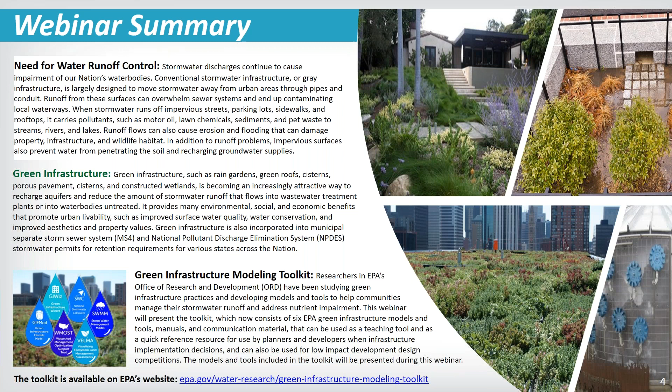And before we get started, I'm just going to give a really quick background for people on the line who aren't as familiar with stormwater management and issues. There are several issues with stormwater management across the country. We have cities with combined sewer systems, which is stormwater and sewer waste combined in one pipe. And when we have storms, this can cause wastewater facilities to get overwhelmed.

So a lot of times the stormwater, which is polluted with different things that are picked up as it's running down the streets and roads, is discharged raw into receiving water. So sometimes we have untreated water being put into our water bodies. And also, as we've been seeing lately around the country, the past few days especially, it can result in a lot of flooding as well when we're talking about traditional infrastructure, pipes.

And as you can see here, there's some pictures of what traditional infrastructure looks like for stormwater management. There was an EPA needs survey in 2012, and you can see here there's billions of dollars in need for stormwater management control.

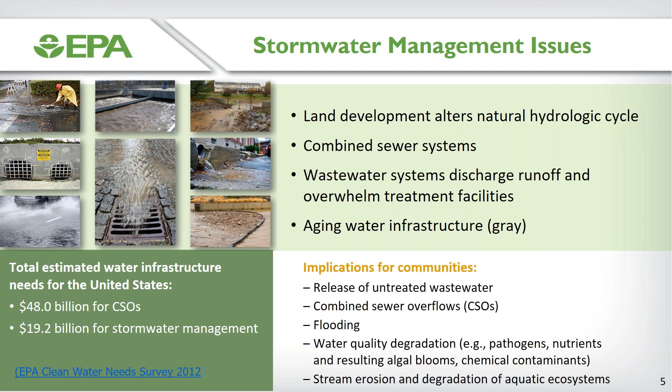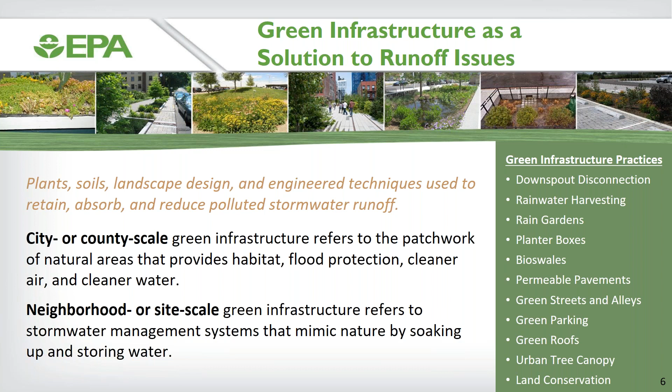And so we consider green infrastructure one solution to stormwater runoff issues. Green infrastructure is really a natural way of allowing water to reabsorb back into the environment as it would naturally. And you can see here the different practices that we consider green infrastructure. And benefits, of course, there's water quality benefits, but there are also cost savings, community aesthetics, and air quality as well.

So at EPA, we're working with states and communities. We're identifying implementation opportunities to provide either green infrastructure implementation or even a combination of green and gray, because we know everything can't be replaced with green infrastructure. So we've been working on developing models and tools to integrate green infrastructure or a combination into different communities for managing their stormwater.

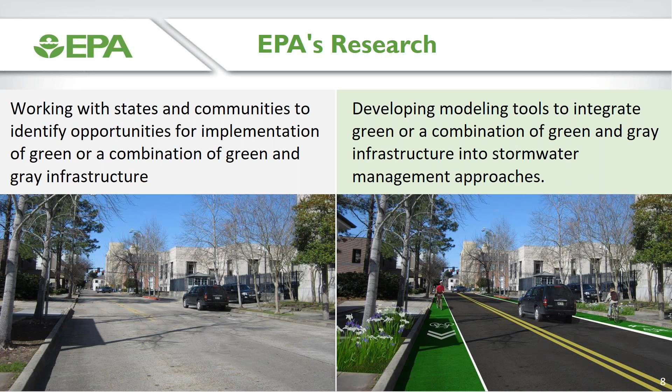So over the years, we have been working to develop numerous models, and what we've done is pulled them together in a toolkit. This toolkit originally had 5 models when we started. We now have an addition, which you'll hear about today, our 6th model. And so the toolkit has the models, the manuals, fact sheets, and also a summary video. It's a really good training video that you can use in academia, or in your communities to show decision makers what these tools do, who can use them, and it'll help you make good choices as far as what model might work for you.

So with that, I'm going to introduce our first speaker for Green Infrastructure Wizard, Dr. Marilyn Tenbrink, who is a special assistant to the director of our Atlantic Ecology Division in our Narragansett lab. So with that, Marilyn, I'm going to turn it over to you.

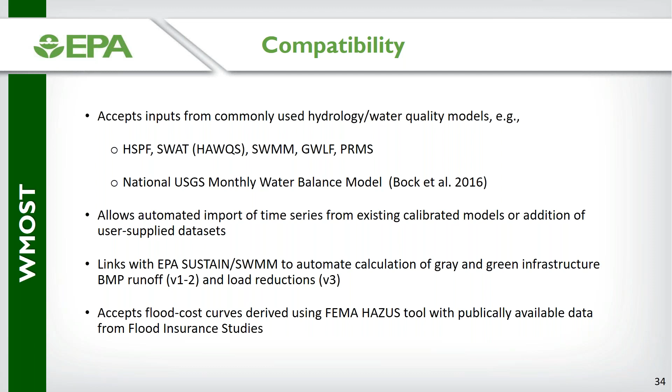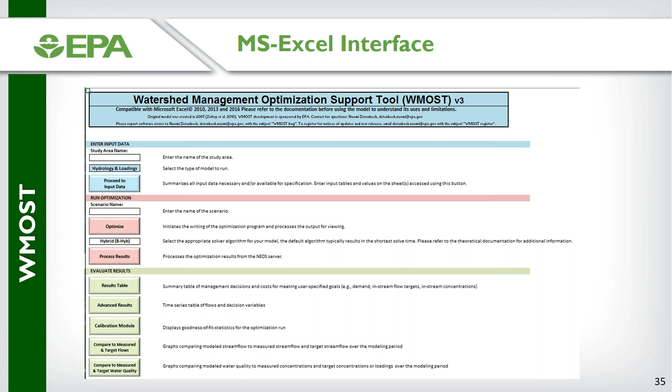We have a wide range of management options that you can explore in WMOST, including land conservation, water conservation, demand management or incentives, changes in infrastructure for both drinking water and wastewater. This can include fixing leaks, increasing capacity, changing sources, or upgrading these systems to improve water quality. We also allow users to evaluate water reuse facilities and aquifer storage and recharge, interbasin transfers, and a wide range of best management practices, including green infrastructure.

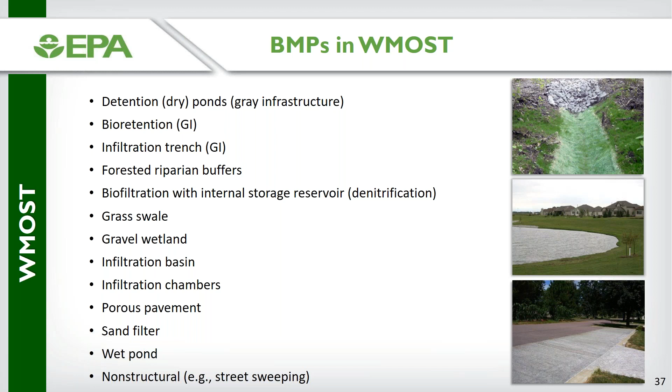We're continuing to add functionality to WMOST. These are some of the things we're working on currently. We're adding to the data library of pre-processed models. I've shown a list here of some of those that we'll be adding. We are working on robust decision-making modules, which take advantage of WMOST and help the user to find robust solutions in the face of uncertainty in future climate scenarios.

We are working on a co-benefits module, which will allow the user to examine ancillary benefits of the management practices, including GI, such as ecosystem benefits, human health, energy savings, improvements in real estate values, reductions in drinking water treatment costs, etc. We have a number of training and tech transfer activities going on.

In addition to this webinar, yesterday we had a webinar just focusing on WMOST. That will be available on the EPA Tools and Resources website. We have another upcoming webinar that will go into more detail on March 8th as part of the EPA's water quality modeling webinar series. We also have training materials posted online on the website, so you can refer to that for more information.

We are also creating a parallel version of WMOST. WMOST optimizes only for cost, but allows people to address multiple goals as constraints. The multiple objective version of WMOST will allow people to look at different objectives simultaneously and to generate trade-off curves. And finally, we're starting to look at scaling up and linking watersheds. WMOST is currently designed to deal with the small watershed scale, say HUC 12 to HUC 10, to about 10,000 to 40,000 hectares.

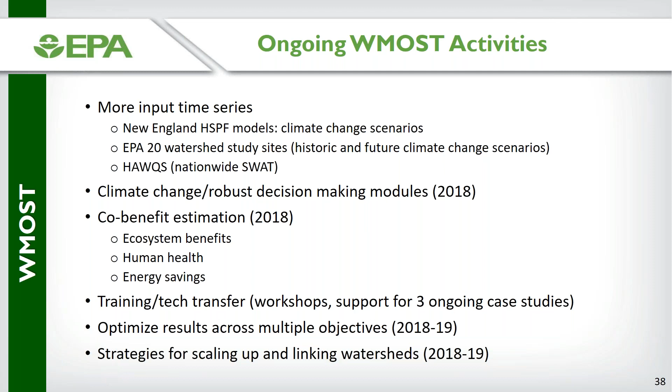So with that, I will turn it over to Dr. Bob McKane to talk about the VELMA model, Visualizing Ecosystems for Land Management Assessment.

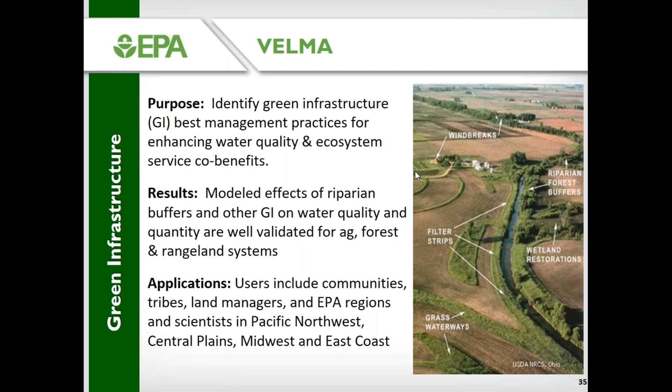Okay, so VELMA is a watershed model. It provides a look at fate and transport of water and nutrients, and it scales from small plots up to watersheds, including regional watersheds such as the Puget Sound ecosystem. And we've simulated a 10,000 square mile area in eastern Kansas, and I'll mention that briefly too. But the idea behind VELMA is that it's a very fine scale look at green infrastructure. The watersheds are divided up into a grid. The user can specify the grid size. We go as low as 2-meter size grids for various purposes such as urban applications. And this allows us to look at how riparian buffers function.

VELMA is an eco-hydrological model, meaning that it's a hydrological model linked very tightly to a biogeochemical model, in other words, a nutrient cycling model. And we're also entering contaminant cycling into this as well. It simulates the effects of climate and land use on stream flow and transfers within soil columns. It represents vegetation and soil interactions, and so it simulates the uptake, transformation, and transport of carbon, nutrients, and toxics from terrestrial to aquatic systems. And it does a very good job of that. We've done a lot of validation.

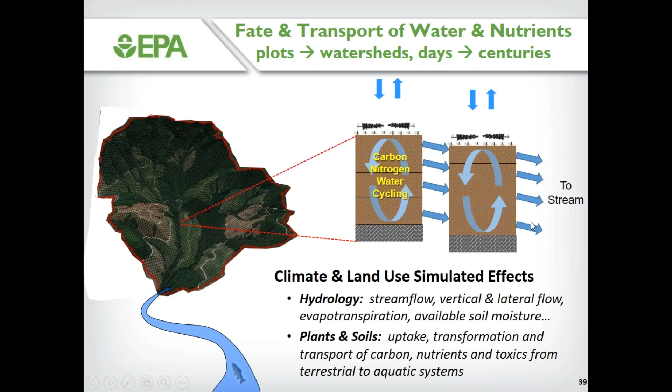And buffers provide very good protection, as we all know, for stream water quality. And it simulates that. If these near stream areas are cut, then you get an increase in the flow of water and nutrients to the stream. And that impacts fish habitats. And we're linking to various wildlife and fish habitat models to look at consequences downstream.

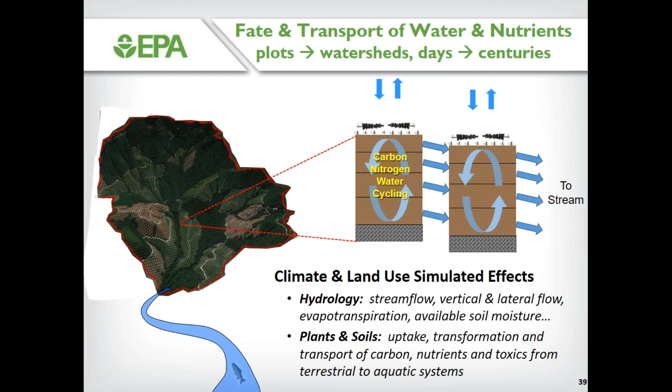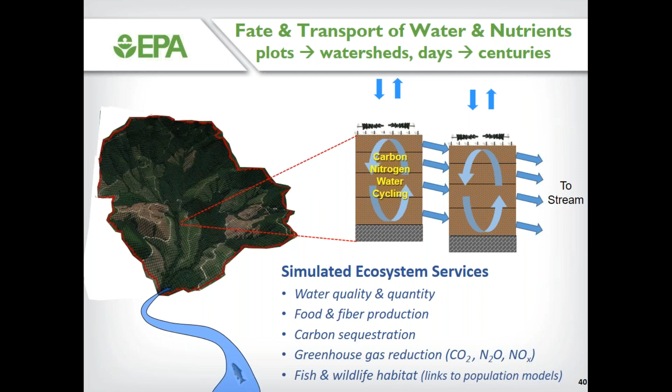Simulated ecosystem services include effects of climate and management on water quality, drinking water, recreational opportunities, and also flood protection. Food and fiber production is included. This is all dynamic. Simulations run from days to centuries if you need to do that. It also simulates carbon sequestration and opportunities for carbon trading. I'll talk about that briefly. Also, climate regulation through greenhouse gas reduction. And that's all in the biogeochemistry of the model. And as I said, we're linking to fish habitat models especially, and ultimately also terrestrial wildlife. So VELMA's been applied in many places across the country.

Starting down here, we began with the Chesapeake Bay Agricultural Forest Buffer Effectiveness Study, and I'll talk about that. And I'll also focus on salmon recovery planning in Puget Sound and how that's going. And we're working at the scale of national estuary programs out west here, Tillamook Bay and also Puget Sound.

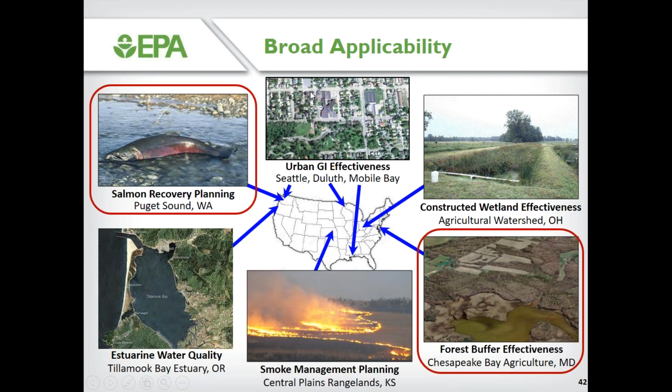We are nearing completion on a smoke management planning effort with Region 7 in eastern Kansas, and just moving into urban green infrastructure effectiveness. So let me begin with an example, the Chesapeake Agricultural Water Quality project that we began a few years ago now, working with the Smithsonian Environmental Research Center, and we've validated VELMA for an example study that was intensively studied.

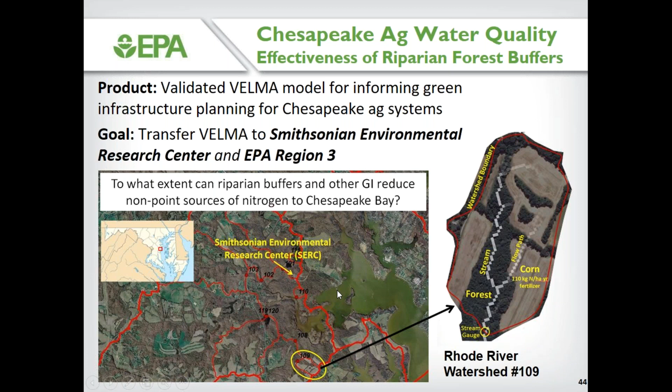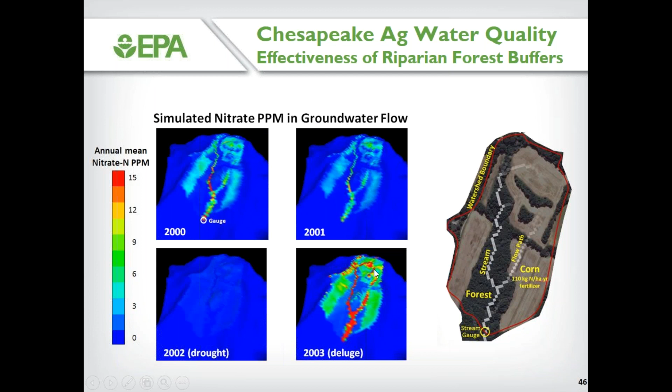But it's leaky. During this deluge of 2003, the riparian buffers were actually overwhelmed and couldn't perform as well as you would like to see. So that's shown here. This is simulated nitrate in groundwater flow, and you can see how much breakthrough there is during this deluge. Very interesting results. And we did sensitivity analyses that showed that present-day buffers were working quite well in most years until that deluge, and that they can reduce ag nitrate sources by about 90%, keeping that much out of the stream.

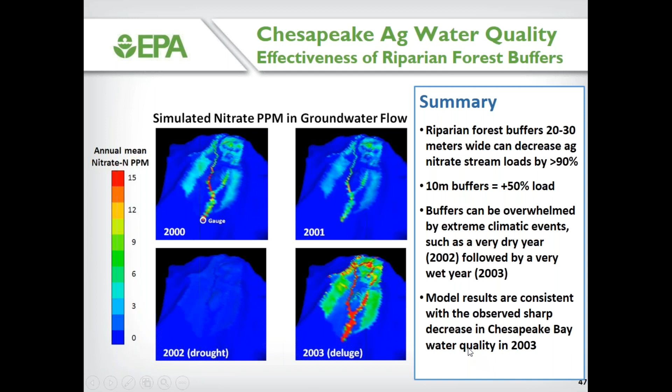If you were to cut the existing buffers back, that would increase the nitrate load by about 50%. So the message here is that buffers work really well, but they can be overwhelmed by extreme climatic events. And so perhaps one option would be to think about cutting back on fertilizers. And VELMA does trade-offs between ag production and water quality protection. I'm not going to show that here. There just isn't enough time. But the model results are consistent with the observed sharp decrease in Chesapeake water quality in 2003.

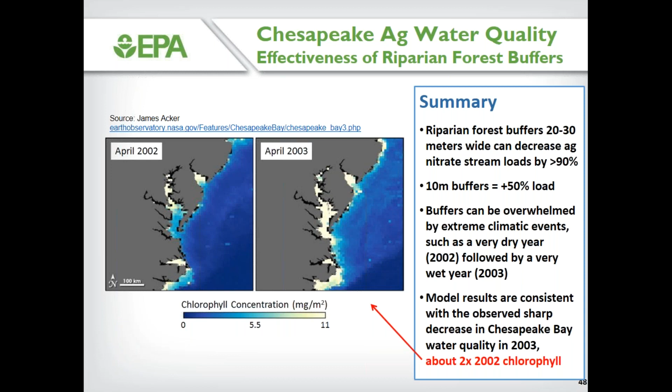In 2002, which was the drought year, this is a satellite translation of chlorophyll concentration, in other words, algal blooms within the bay. And you can see it's not great, but it's not doing too bad. 2003, when all the fertilizers had built up during the drought year, and then more fertilizer added in 2003, you can see that there was a major algal bloom all across Chesapeake Bay. So VELMA is really indicating why that bloom happened, that there was breakthrough through the existing buffers. And so as I say, one consideration for decision makers is what should be the cap, if there should be one, on ag fertilization to avoid this sort of thing.

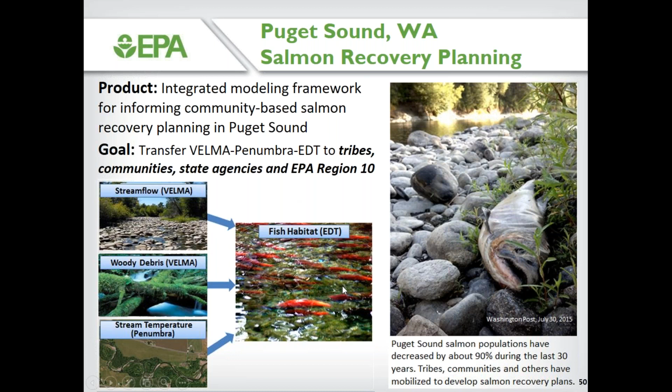Moving to Puget Sound, we're working with tribes and communities in Puget Sound to assist them with salmon recovery planning. Salmon populations in Puget Sound have decreased by about 90% during the last 30 years. And tribes and communities and others have mobilized to develop recovery plans. They are currently using VELMA to look at effects of land management on stream flow and woody debris, and we've also built a stream temperature model into VELMA so that we can pass all this information to a fish habitat model and parse out how different species of salmon are affected. And a key result of that is that for the system we're studying, Puget Sound is up over here in the upper left.

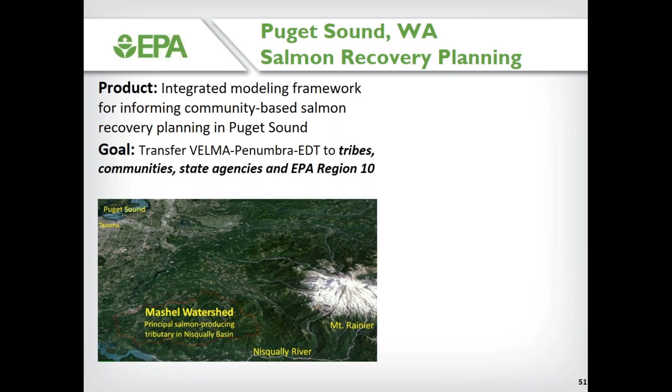The river that we're studying flows off Mount Rainier, flows 80 miles to Puget Sound. And this is the primary salmon producing tributary to the Nisqually River. And heavily harvested, as you can see, these lighter areas in this satellite photo are clear cuts. And so what we found is that by going to longer rotations, summer stream flow could be doubled.

Not enough time to get into that story, but it's basically an age effect on transpiration that causes this stream flow increase. And so we are able to inform policies that are being considered to try to increase summer stream flows for salmon when they try to swim upstream in the late summer and spawn.

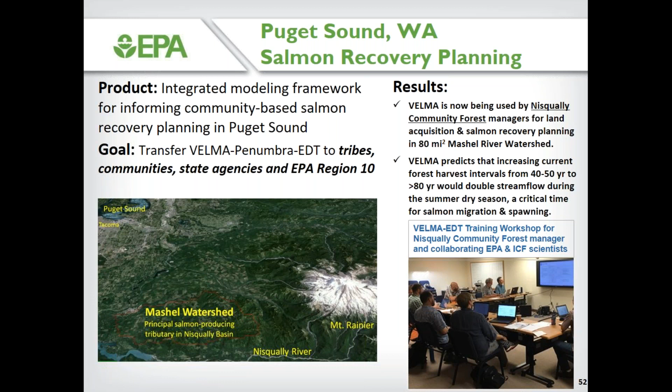Right now in this watershed, which used to have 10,000 steelhead come up in the fall, they're down to about a couple hundred steelhead. And so right on the brink of extinction. Chinook salmon have already gone extinct there.

So a key thing is trade-offs, as our other presenters have talked about. We're currently working through final simulations for the study watersheds and comparing industrial forest practices, which seek to basically increase timber yield and profit for shareholders. Very few local dollars result from that to local communities because the timber gets sent out overseas.

And the community forest approach, we're working with various community forests in the region, and we're trying to balance ecological, economic, and cultural benefits for tribes and communities, and coming up with solutions that end up with a better balance of efforts, and including ecosystem carbon stocks.

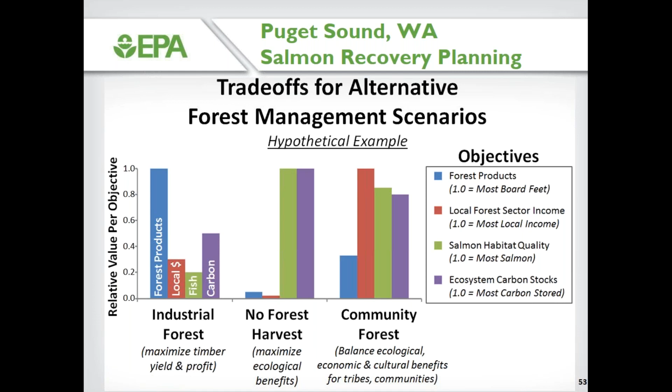The community forest owners that we work with have just made the first deal in Washington State to sell carbon credits to Microsoft, who wants to balance their carbon budget. So that's it, and thank you.

I would like to introduce Michael Tribby, and he's going to talk about SWIM.

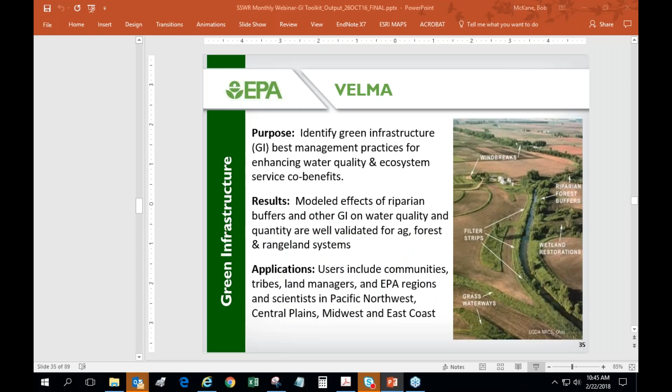Great presentation, Bob. Thanks. Can everybody hear me? I will take that as a yes. You're good, Michael. We can hear you. Okay, and I trust that you can see my presentation. It's getting there. Okay. How about okay, you're good. Thanks. Yep. Fantastic. Thank you.

So I'm going to switch gears a little bit here. Bob talked about VELMA, which is a great model for dealing with natural watersheds and rivers. And I'm going to talk about SWMM, which is applied in urban watersheds.

So the major difference is that an urban watershed is dominated by man-made drainage structures like curbs and streets and hard surfaces and stormwater catch boxes, and a network of sewer pipes that conveys stormwater and sanitary wastewater to treatment plants.

Okay, and SWMM is a model for simulating these types of environments and the drainage structures found in these types of environments. So we call that urban hydrology and hydraulics modeling. A key feature of SWMM is that it's a dynamic model. So it allows the user to predict the transient response of the drainage system to a storm event. And this is important so that we can determine if the drainage network is sized properly and is going to perform the way that it is intended to perform.

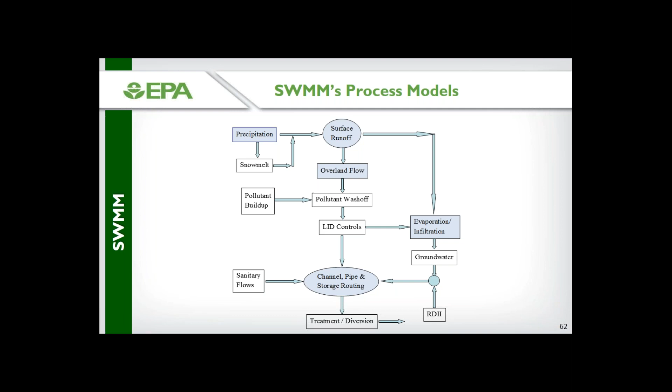And SWMM has been around for a really long time. It's nearly as old as I am. It's going to be 50 years old in 2021. In its early history, it was written in Fortran. And in the early 2000s, it was redeveloped and rewritten entirely in the C programming language. And it has been under active development by the EPA since the early 2000s.

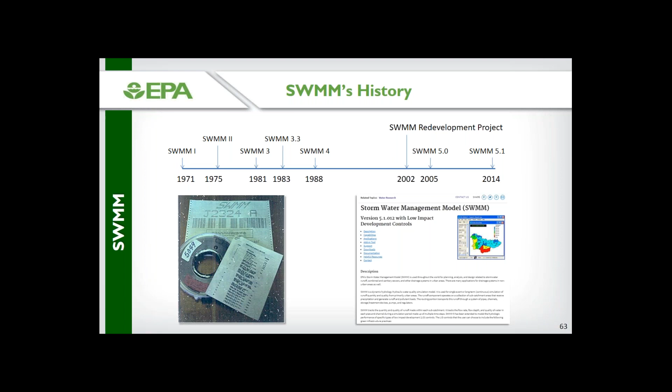So who uses SWMM? Well, SWMM is a professional tool that's used by licensed civil, environmental, and stormwater engineers. It is used by municipalities that design, maintain, and manage stormwater infrastructure and sanitary sewer infrastructure. And we're proud that SWMM is used across the United States and around the world.

We routinely take support requests from consultants who serve municipalities in the United States, and we take questions from all over the world: South America, China, other parts of Asia, Africa, Europe.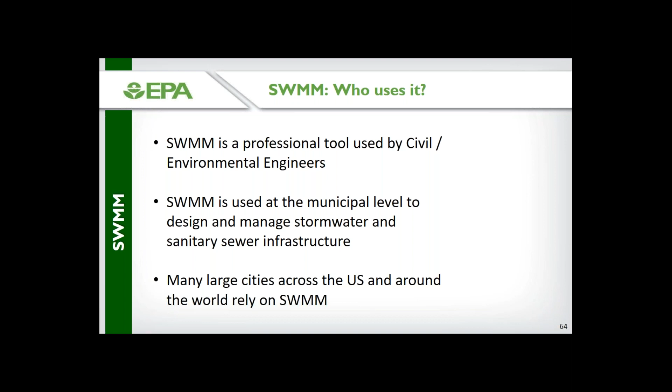And what do these people use SWMM for? Well, specifically, they use SWMM to design and size their man-made drainage system components. They use it to develop control strategies for combined sewer overflows, like Michelle described at the beginning of the presentation. They model groundwater inflow and infiltration into sanitary sewer systems.

They can use SWMM to better understand non-point source pollution in urban watersheds. And they can use it to evaluate green infrastructure stormwater control alternatives. And it's used for floodplain mapping of natural channels.

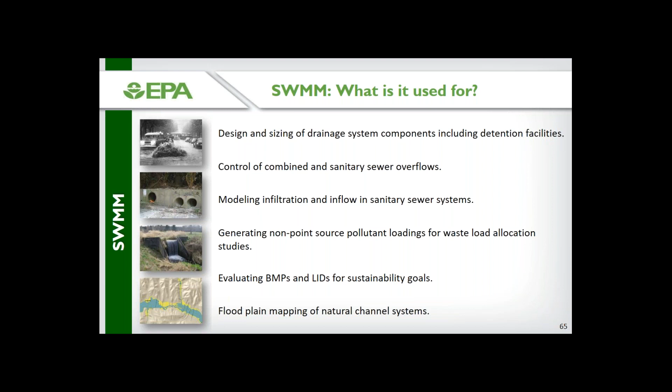One of the most recent additions to SWMM is the capability to model structural green infrastructure BMPs. So SWMM includes process models for a wide complement of green infrastructure controls. And there's many different types to choose from that can be flexibly used in many different drainage control applications.

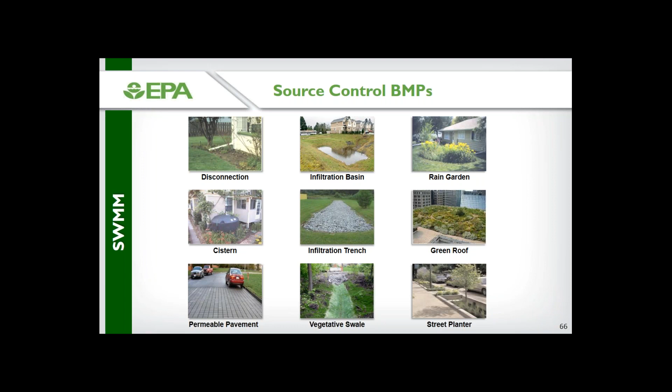So now I'm gonna switch gears and do a little example for you to show you what the SWMM model can do. And because SWMM is widely used and it combines the ability to model both green and your typical gray infrastructure stormwater control strategies, it's an ideal platform for developing and evaluating hybrid control, which is stormwater runoff control strategies combining both green and gray infrastructure. So this example is designed to illustrate that.

So this is a typical SWMM application. It's an urbanized catchment of 500 acres, and it produces an average daily flow of 1 million gallons of wastewater per day. And when it rains, this combined sewer overflow gets activated about 64 times annually. And so that would result in a direct discharge of stormwater and combined stormwater and wastewater into the river, which is something that we don't want.

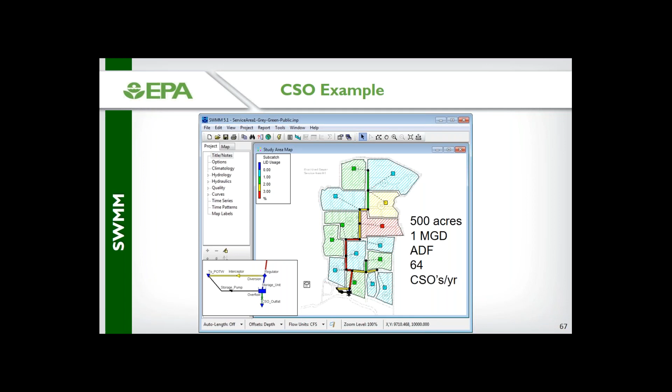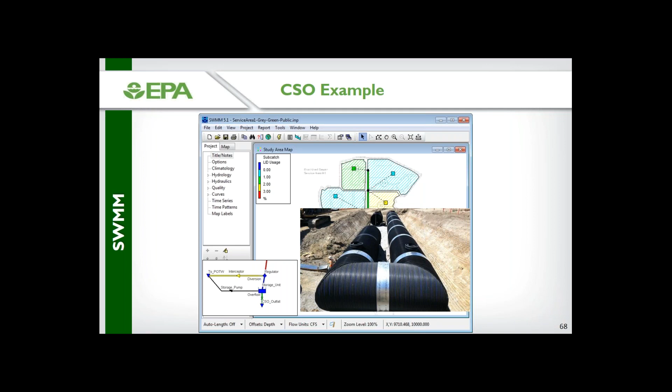So here you can see what the storage unit would look like. It's a prefabricated storage unit that would be installed below ground, and the design task for the engineer would be to determine how much storage volume would be required, and then to design the piping and the pumping systems to convey it to the wastewater treatment plant.

And then we have a green infrastructure control strategy, which would involve placing porous pavement installations and street planters around the 500-acre catchment in such a way that they would directly intercept runoff and infiltrate it into the ground in place. And these porous pavers and street planters would be located in public right-of-ways, like along the street or in the right-of-way adjacent to the street. And then to promote additional infiltration, they're also looking at alternatives of installing rain gardens and downspout disconnection rain barrels on private property.

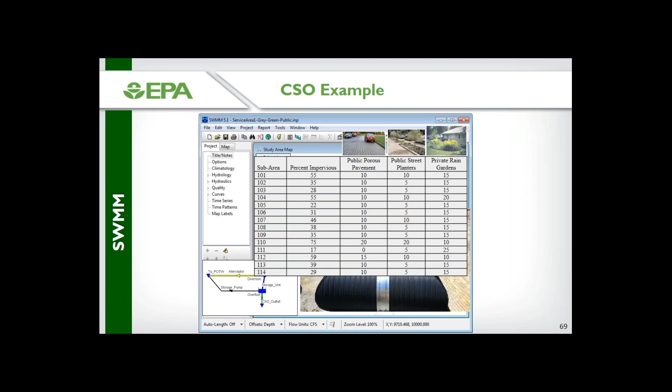If we combine the gray infrastructure strategy with green stormwater control strategies, we can reduce the total storage necessary. So by combining these strategies, we can install a storage pipe with only 1 million gallons in total storage, and then offset the rest of that volume with increased infiltration throughout the watershed at our GI installations. And we get the same level of CSO control, and we also get the benefit of neighborhood beautification and other co-benefits from the GI installation.

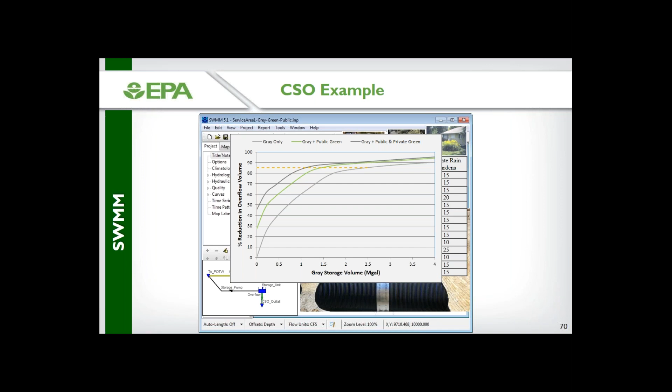So just to wrap up, SWMM is widely used across the country and around the world to design gray infrastructure control strategies. And now that SWMM offers LID controls, it's a very useful tool for investigating hybrid control strategies. And that is the conclusion of my presentation.

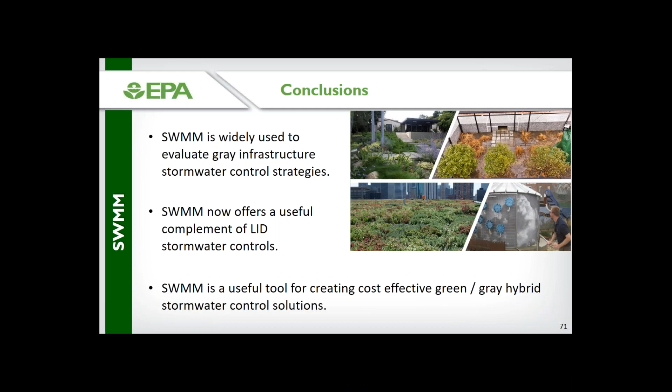Thanks, Michael, for the introduction. So I'm going to talk briefly about the National Stormwater Calculator, which is actually based off of EPA's SWMM model. And the way I like to think about it is it's been called sort of a TurboTax version of SWMM.

So the calculator has SWMM programmed in the background of it, and it is meant to do the same type of pre and post construction stormwater runoff analysis as SWMM, but it's geared towards smaller sites, so sites that are less than an acre to about a dozen acres in size. And it has been developed for non-modelers and can be used anywhere throughout the U.S., including Puerto Rico, Alaska, and Hawaii.

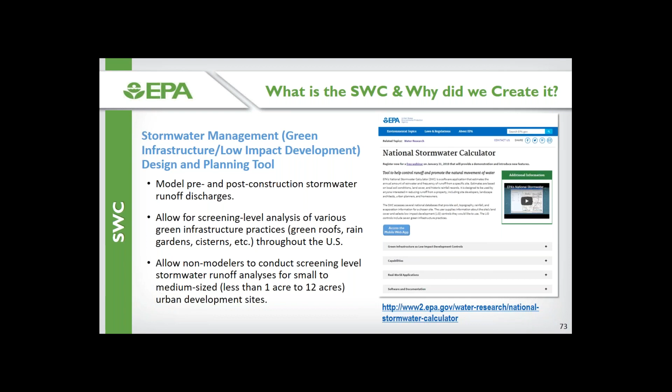And this is our website for the calculator, where we have both a new mobile web app version of it and a desktop application of the calculator. So we have a lot of the same applications as some of my colleagues have presented earlier for the calculator. It has been used to assist state and municipal agencies with their post-construction permit standards. It's been used by property owners for voluntary stormwater retrofits.

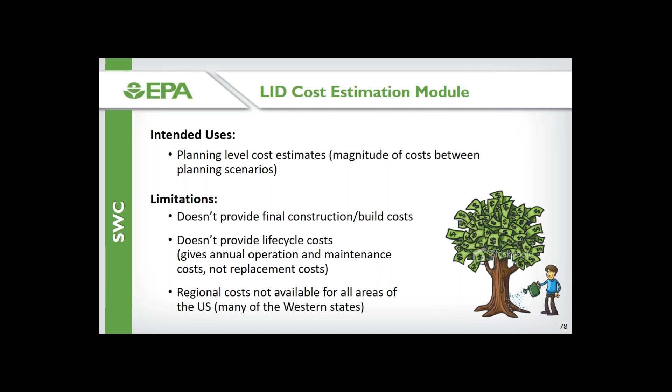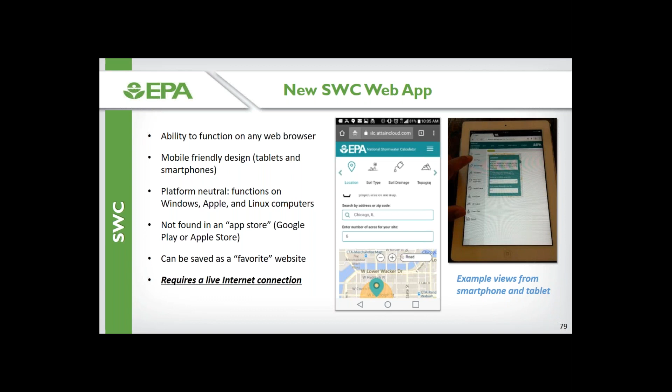So these are some example screenshots of our web app on a smartphone and also on a tablet. And you can save it or bookmark it as a favorite on any internet web browser.

So I'm going to go quickly through an application of the web app version of the calculator in northern Michigan. This is an actual project where our Great Lakes program has been coordinating with the city of Northport, Michigan, in the design and planning of a Green Streets project. And so with this application, they did not use the calculator for their planning and design purposes, but I wanted to show how in the planning stages of such a project, the calculator can be used by communities.

So in stepping through the calculator, you'll see in the web app on the left-hand side, there are icons for various data sets that we've integrated into the calculator. And all these data sets are available anywhere throughout the country that you use the calculator. You don't have to have any data uploaded into it. We've programmed that for you.

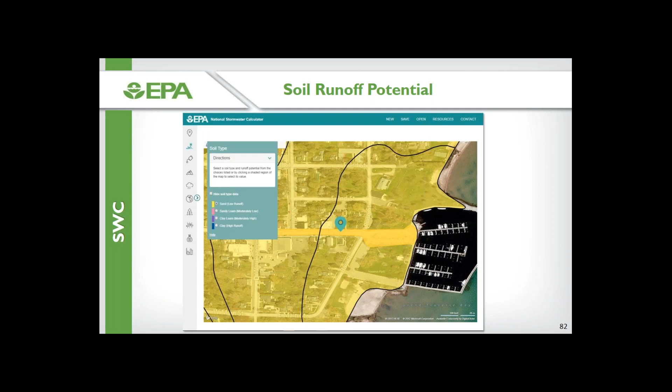So the first 3 tabs that I'll go through are based on soils data that we retrieve from the USDA. And the first polygon that you see here is the amount of runoff from your site. So you click on whatever polygon your project is located on. In this case, it's a low runoff polygon.

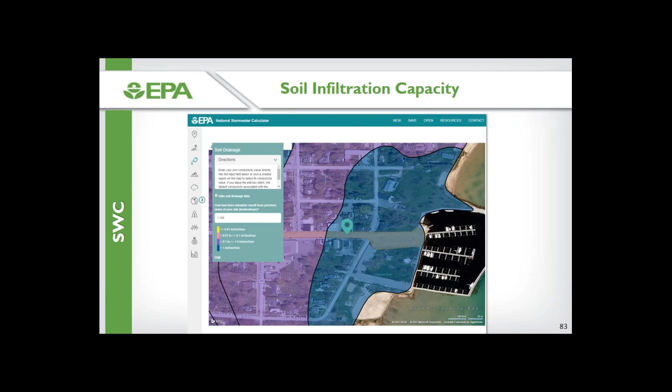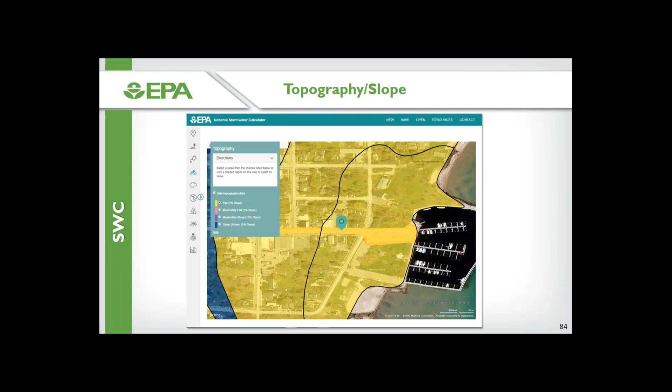And then you click to the next icon, which is a little bucket pouring out water, and this is representative of the rate of infiltration of runoff for that same soil polygon that you selected before. And this will give you an estimate of the inches per hour of water infiltrating into the soils for your site. And then the last characteristic of the soils is the amount of slope. And it ranges from flat to steep. And again, you can select the polygon that's representative of your site. And in this case, it's a 2% flat slope.

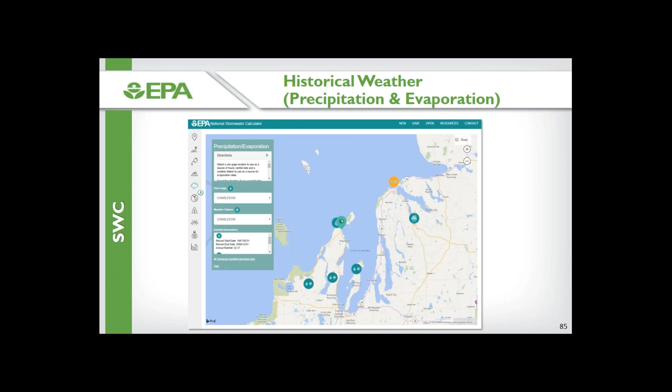The last weather icon is this globe, which stands for our climate change tab. And this lets users, if you would like, look at different bookend representations of climate change scenarios. We have a near-term and a far-term scenario, so looking at about 30 to approximately 60 years out into the future. We have some helpful resources listed towards the upper left that can give our users information on which climate scenarios are most applicable for their area of the country.

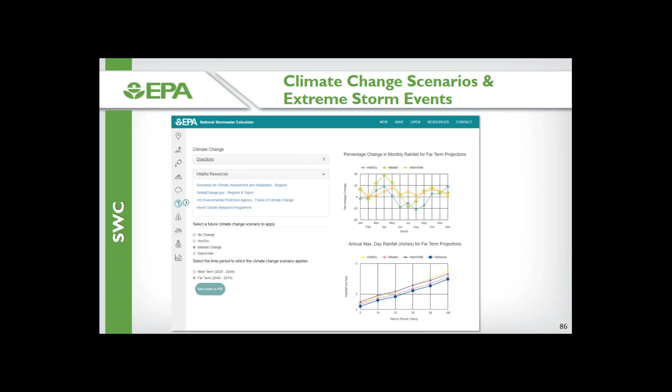On the right hand of the screen, you'll see the top graph shows the different scenarios that you're able to choose and the percent change in monthly rainfall associated with each of those scenarios. And then towards the bottom right corner, we have max annual daily rainfall, which is looking at what that is for different return periods, ranging from a 5 to 100 year storm.

And then the next icon, you're looking at land cover. You can put in existing land cover or proposed land cover. We have 4 types that the user can identify based on percentage, and then whatever is left over from what you've put in will be assumed to be impervious cover for your site.

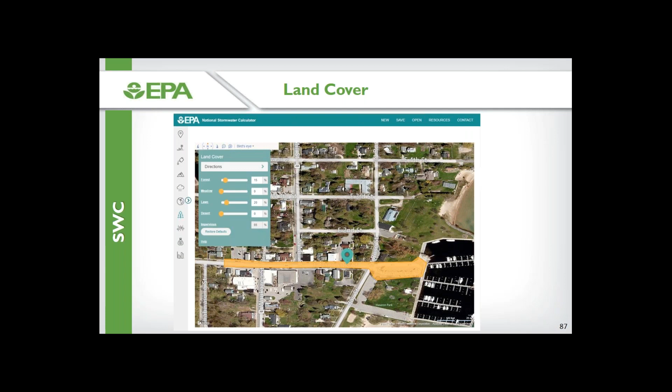And then this is the most exciting part, I think, where users get to select the amount of impervious cover for your site that is managed by each LID, or low impact development, control. You can click on the name of each LID control and pop out a window which allows you to size your LID control, or you can auto size it based on a design storm.

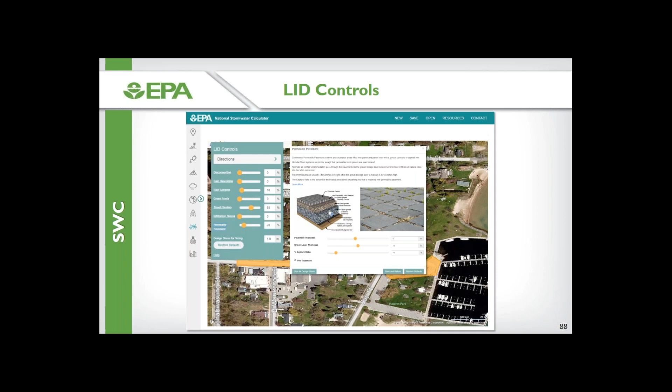And then with our project cost, there are a few things that you enter information about, such as if it's a redevelopment or a new development site. If you have poor to excellent site suitability, so thinking about what's the slope of your site, the access of construction materials and equipment to your site, are there any existing utilities to be aware of? And then lastly, you will pick a cost region.

So the cost region is where we've taken data from the Bureau of Labor Statistics on some of the most common materials and types of labor classes that actually do construction and operation and maintenance on these types of controls. And we have data that is updated annually from the Bureau of Labor Statistics that feeds into regression equations that we've developed for each of the LID controls based on available literature.

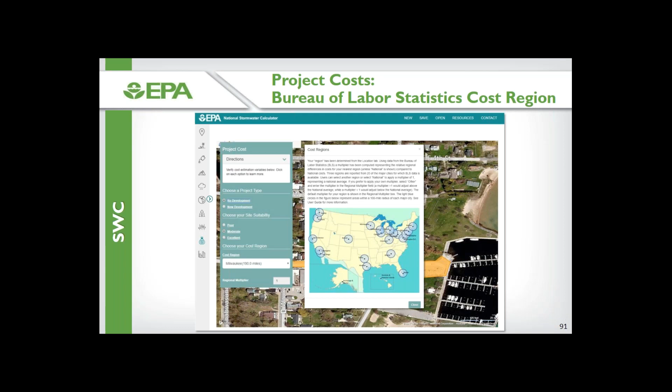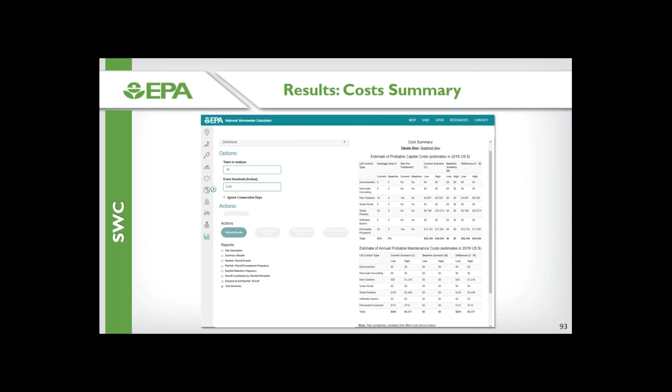And then last, you hit refresh results, and you will get different report outs on statistics for the amount of runoff that's controlled by the type of LID practices that you've chosen. And those reports can be selected on the bottom left. And this is an example of the cost summary for capital cost and maintenance cost.

And lastly, I just wanted to say some next steps that users can use these results for can be sharing with decision makers, applying for funding, and helping with the development of implementation plans for projects. This is an example of how some training on the calculator assisted a community in Baltimore, Maryland with receiving grant funding. And if you want to learn more, we have a great user's manual and a fact sheet where you can read up more about the Stormwater Calculator.

Okay. And then I would like to introduce my colleague, Dr. Arash Massoudieh. Dr. Arash has developed the Green Infrastructure Flexible Model tool and is a professor in civil engineering at Catholic University.

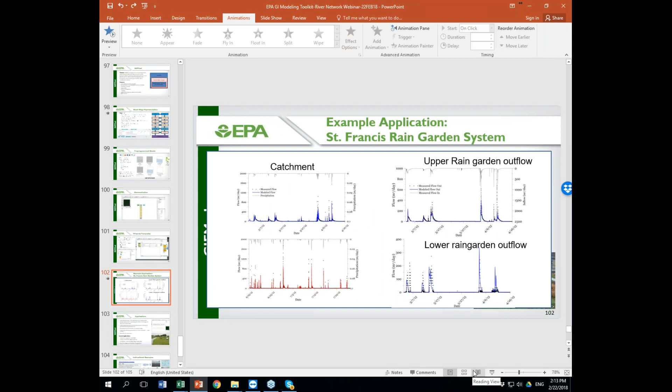Did we lose? Oh, there you are. Okay. Oh, okay. So let's see. Okay. Do you see my screen well? Yep. You're good. Okay. Sorry, gotta go do.

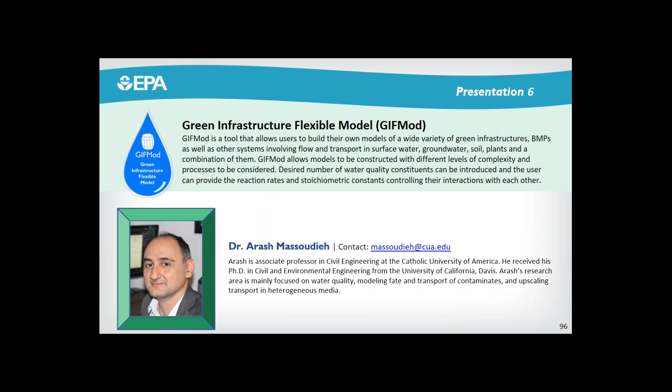So the tool that I'm going to talk about today is GIFMod. It's a relatively new tool. Most of the models that are used for evaluating the impact of green infrastructure or agriculture BMPs, and some of them were referred to or talked about during the previous presentations, are essentially designed for larger scale or watershed scale applications.

Now GIFMod is designed to allow users to evaluate the performance of individual green infrastructure or BMPs while considering the processes within them. So the aim has been to allow the users to build a model that can represent detailed processes controlling hydraulics, particle transport, and chemical fate and transport in the systems.

The philosophy behind developing GIFMod has been to make it as flexible as possible and expandable. So an effort has been put so that the least amount of things are hard coded, and then the modeler can design or conceptualize their system as they desire.

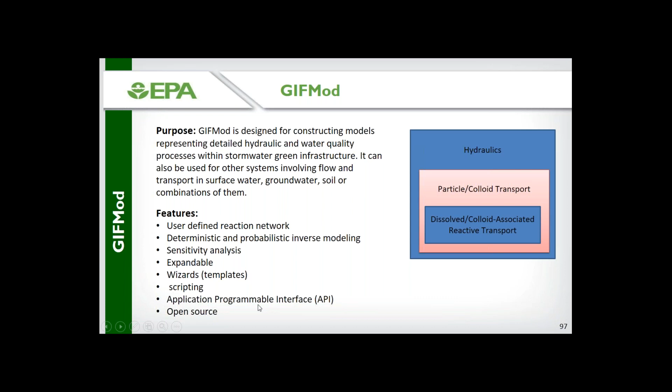So essentially, the model is based on blocks and connectors. The user can build a model by introducing blocks representing different parts of the system, and connectors representing their connection or how things are transferred from one block to another block.

So what you see here is, for example, if I want to model a stormwater pond, you may want to just consider a single pond and consider the chemical reactions happening in it, and also define the flow rate out of the pond using a rating curve relating the storage in the pond to the flow out.

But you may also want to make it more complex by breaking down the pond into two components. We may be interested in modeling the processes happening in the sediments underneath these ponds. For example, if the sediments become anoxic and some denitrification happens, we may add a soil layer and consider the interactions between the pond and the soil. For more details about the processes in the sediments, we can discretize the soil into several layers.

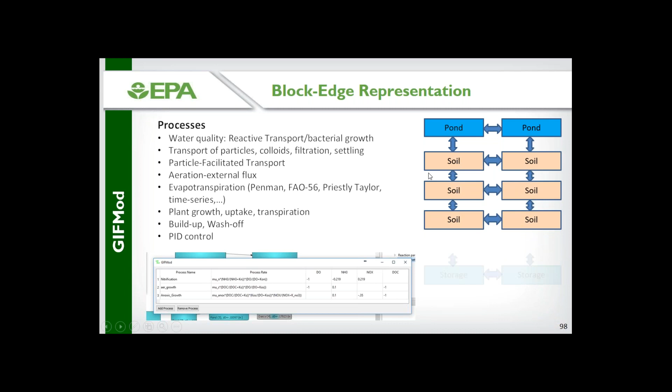If you want to model a bioretention system, it may have a storage layer, so we can put a storage layer underneath the engineered soil. And we may also be interested in finding the effect on groundwater, in which case we can include groundwater. So the processes that can be considered in the model include water quality. We can model reactive transport. We can also model bacterial growth explicitly.

It can model transport of particles and colloids and consider processes such as filtration and settling that are important for many types of green infrastructure. It can model particle facilitated transport, when chemical constituents like heavy metals bind to fine particles and are transported by them. It can do aeration or external flux, for example, if we aerate a stormwater pond to keep it oxygenated.

It has evapotranspiration modules with a few options: Penman, FAO56, Priestley-Taylor. Evapotranspiration can be introduced as a time series as well. And there are some other models that also consider transpiration. Then we have plants.

It has a plant block. I'm going to talk a little more, but basically we can model plant growth, uptake of chemical constituents by plants, and also transpiration through the plants.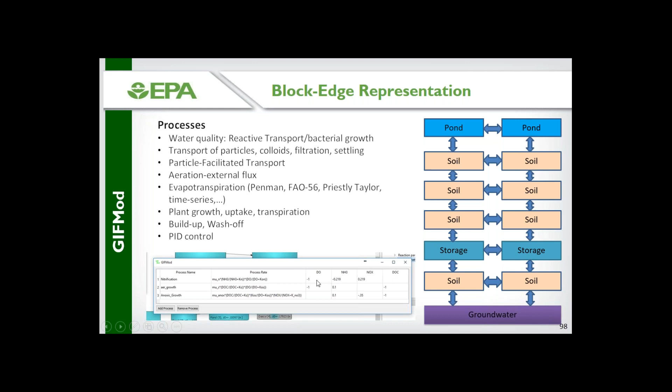So this process rate can be just simple first order decay or something, or it can be more complex, like, for example, dual Monod kinetics and things like that. And then you have some other columns for each of the chemical constituents considered in this particular model. Those are essentially stoichiometric constants.

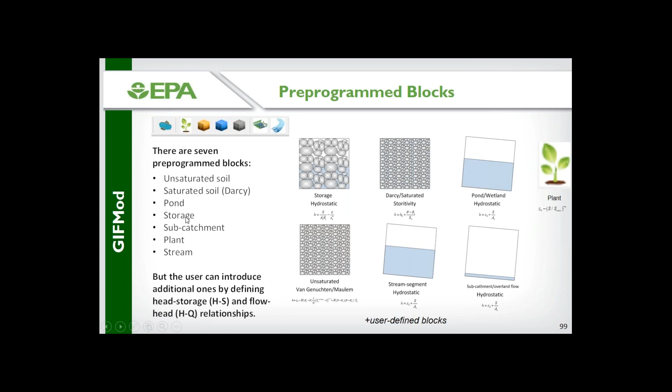So the model, first of all, it's possible to add additional blocks from outside of the code by just providing some relationships between head and storage in the blocks, and then some relationship between head and flow between the blocks. But then it has 7 pre-programmed blocks, including unsaturated soil that uses basically the Richards equation with the van Genuchten-Mualem relationship for solving the system. Saturated soil for groundwater, it has ponds, storage, sub-catchment, plants, and streams.

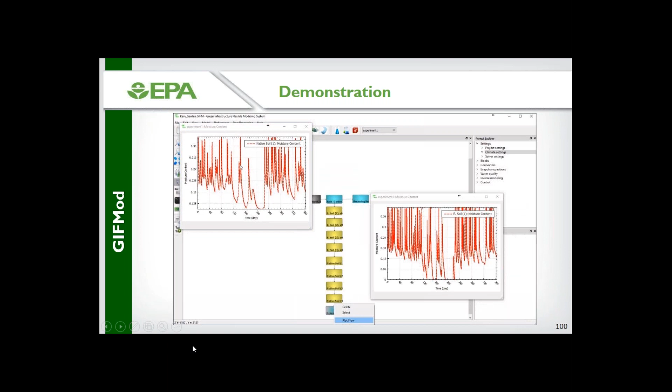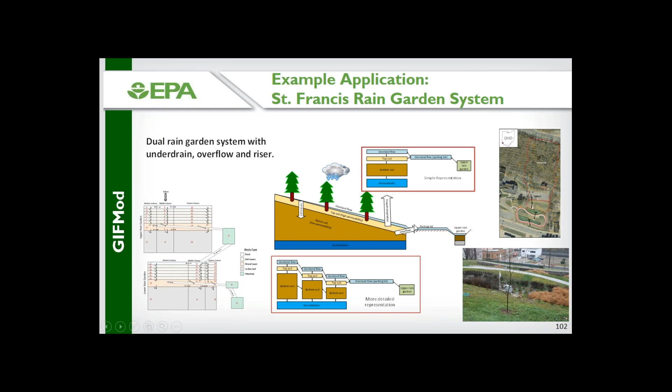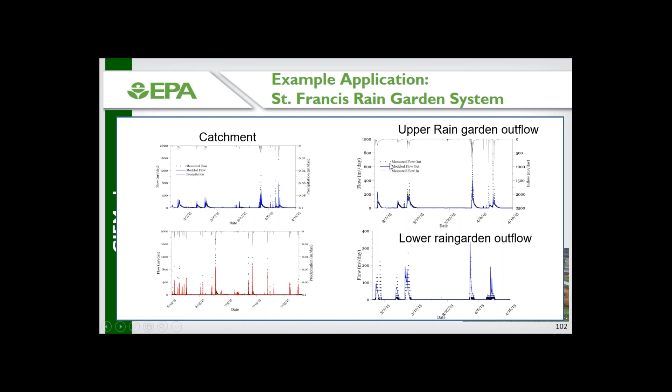Here are some results, some model-measured comparisons. The 2 graphs on the left-hand side of the screen are the comparison between modeled and measured results for flow out of the catchment. The top one is calibration, and the bottom figure is the validation results. Then we have the measured-model comparison of the outflow from the upper rain garden and the lower rain garden on the right-hand side of the screen. I'm not going to spend too much time on this one.

Potential applications: GIFMod can be used to evaluate long-term performance of individual green infrastructure. It can be used for design optimization. For example, if you want to make a change to a design and see what the effect is going to be, GIFMod is a good tool to do that. We can use it to estimate physical and chemical parameters affecting GI performance, and then use GIFMod for predictive applications, to predict the effectiveness of novel designs of green infrastructure, or explore design ideas and so on.

We can also use it to come up with effective models or effective parameters for the performance of GIs that can later be used in larger scale models such as SWMM and so forth. And it can also be used for research and education. Now, GIFMod is relatively new compared to all the other models that were talked about, so it has a smaller user base. I hope this is going to increase in the future.

Currently, we are using it to describe monitoring data on a subsurface vegetated bed, an agricultural BMP. We are using it to evaluate the effect of stream restoration at a site in Washington, D.C. I have one PhD student who is using it to describe catchment processes at an urban catchment in Sligo Creek, Maryland. And there are plans to use GIFMod to evaluate the performance of some green infrastructure at Villanova University in Pennsylvania.